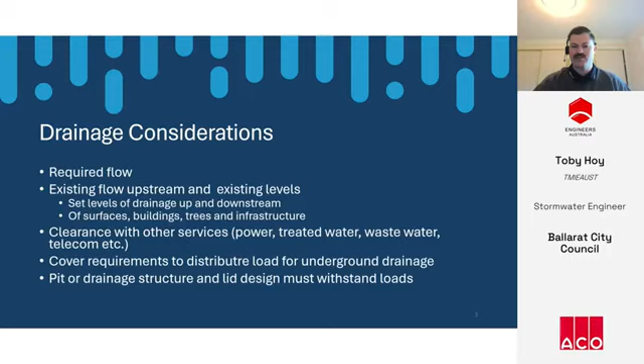For pipes, this is often a choice between concrete and HDPE, high density polyethylene, as these are the two most common pipe materials. We can also consider newer or innovative materials such as recycled plastic pipes. When lack of cover over pipes, flow volume or required loading becomes an issue, reinforced concrete box culverts or crown units become the standard product for use.

When designing drainage, we have to consider the land use where the lid or grate will sit. Different lids will normally be used for vehicle and pedestrian traffic zones. Grates in general should be installed perpendicular to traffic, for example in roadways, so that cyclists don't fall into them. Heel-safe grates are a common consideration for pedestrian zones.

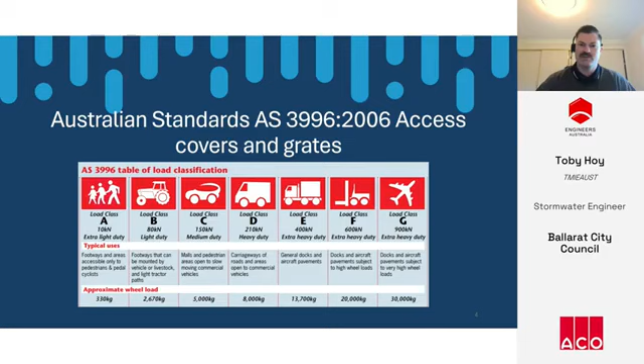As we're using open drains, we'll need regular culverts under roads and driveways. Swales also need maintenance - in this case, the grass needs to be mowed or slashed, and occasionally may need to be reshaped due to organic buildup and washout repair after extreme weather events.

Many open drains use alternative materials, such as brick or stones that have been split or cut. Ballarat was originally a gold rush town and still has many bluestone open drains constructed over 150 years ago. Another option regularly used, particularly for high flow areas, is to place loose beaching rocks in open drains to hold material in place and reduce the washout risk.

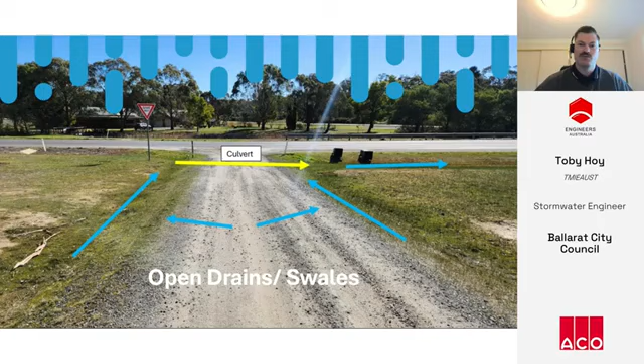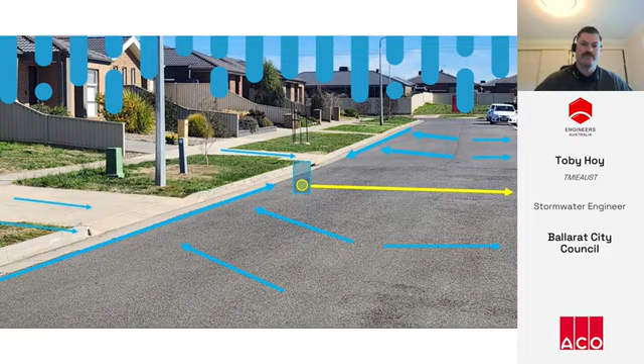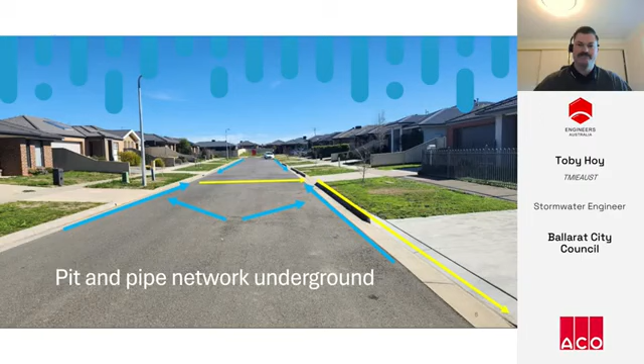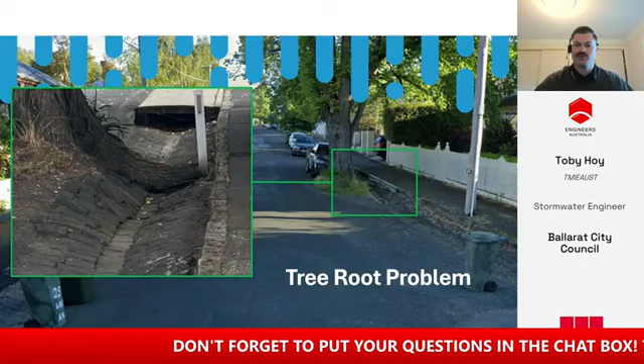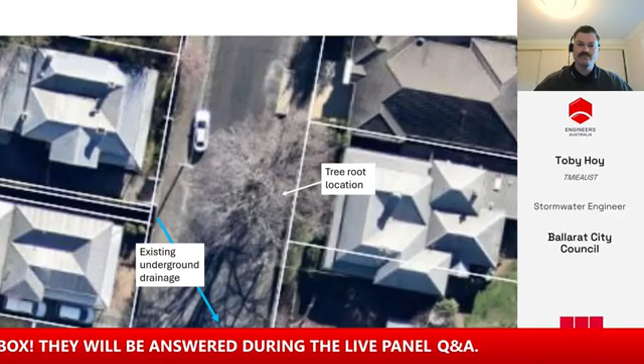In the footpath, we have the power pole shown and two different telecommunication lines. Anything here couldn't be more than 250 millimetres of depth. The tree itself has been assessed to have a maximum 15-year lifespan remaining, and the root in question is structural for the tree, so cannot be removed, chopped or ground down.

We have existing underground drainage nearby to the south. The community in the area didn't want the road, drain and footpath to look much different to how it currently looks, but they also want something done about the sitting water behind the tree root. These are difficult expectations to manage.

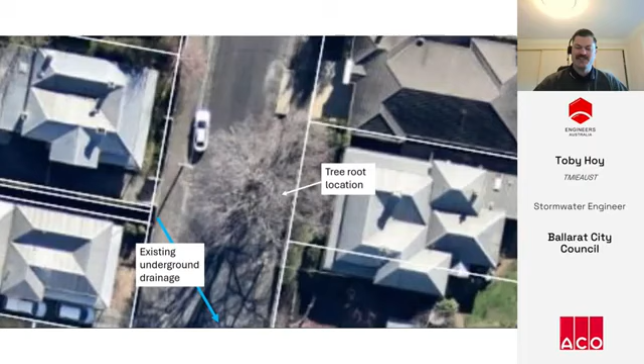A large-scale option that would have worked would have been to install new pits and pipes, or more likely box culverts due to cover issues, to capture the upstream flow and allow the remaining small amount of water to pass beneath the tree root. This would have utilised the existing drainage line to the south that this water enters anyway. Although it would enter earlier, it wouldn't have any capacity issues as it is already taking this current flow. This option would have been quite expensive and not met community expectations.

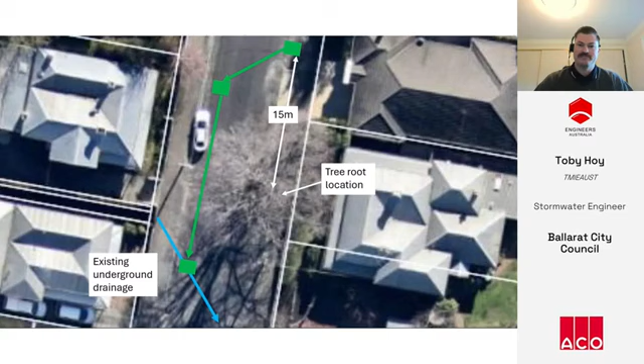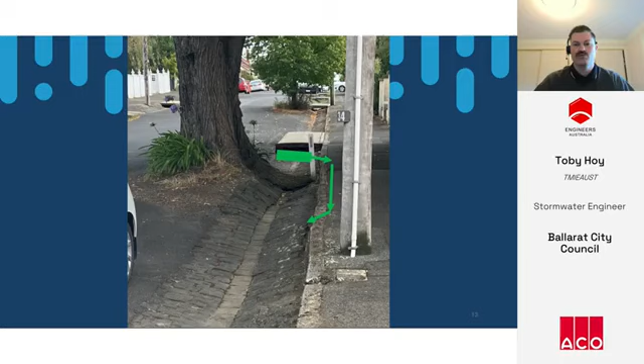Another option would be to construct a pit or end wall in the bluestone drain to capture water and carry it behind the concrete plinth next to the footpath in a grated channel. This would be cheaper than the first two options, but would still require work to tie into the bluestones and footpath, and most likely would not provide a neat finish. While this isn't always possible, it's good to aim for.

We didn't end up implementing any of these options, after I thought it might be worth trying something a bit different from the standard. Have a think about what you might do in this situation while I speak about some resources used by designers, and I'll circle back to what we constructed to manage this issue.

Now, design resources. Many local councils and other government organisations in Victoria have their own infrastructure standards that designers and developers must follow. The Infrastructure Design Manual, or IDM, is a joint initiative that includes over 40 municipalities working together towards consistent requirements and standards for the design and development of infrastructure. In practice, this results in more consistent infrastructure requirements across different areas of the state.

Austroads and VicRoads both have some good resources on their websites for drainage design, as well as a wide range of road-related infrastructure.

Typically, companies sell off-the-shelf products with designs to meet various Australian standards. For example, precast concrete suppliers will make pits to a standard, such as IDM, and provide Class B and Class D lids designed to meet Australian Standard 3996 for access covers and grates, previously mentioned. Australian standards cost money to use for commercial purposes and have only recently become free to view for non-commercial purposes.

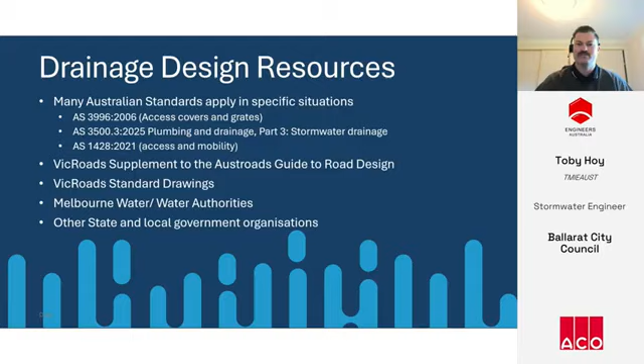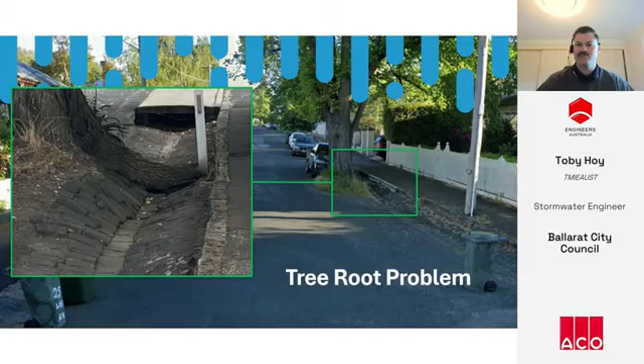Now, back to our tree root problem. Without further ado, we decided it would be worth a trial to replace the concrete plinth with a fabricated steel C-channel, hot-dip galvanised, allowing the existing space of the plinth to be used as a flow path for water and leaves to clear.

This is the result. While this doesn't solve the issue completely, it allows about another 150 millimetres of water to pass around the tree root with minimal disturbance to the surrounding infrastructure, and at a cheap price compared to our other options. It also allows many more leaves to flow with the water around the tree root rather than banking up and blocking the water.

Further, our channel is anchored into a concrete block poured behind, with an asphalt surface to match the rest of the footpath around the concrete and to match the area's infrastructure in general.

Here we have some during-construction photos showing the excavated space for the concrete block to be poured. Construction was in autumn last year, and as you can see, the leaf problem at that time of year is fairly significant.

This C-channel should last well beyond this tree's remaining life, and also has the opportunity to be reused at another location after that time, possibly with some small maintenance on the channel, such as galvanised paint or any sections of hot-dip gal that have broken down.

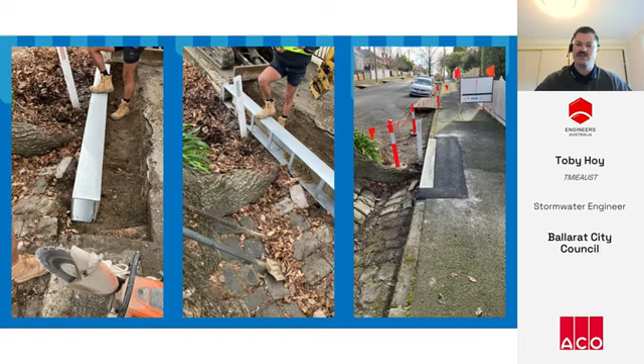For the outlet end of the channel, we formed concrete to a 45-degree angle to direct water back into the bluestones and remove this space for leaves to be caught and sit in the channel.

The C-channel has now been installed and operating for over 15 months. It hasn't been moved yet, over 1.5 autumns and almost 2 winters. So we hope that we will achieve our goal of getting the water past this tree root for its remaining years.

Thanks for listening, everyone, and thanks to Engineers Australia for providing the platform to speak. For my parting words, I'll leave you with a Leonardo da Vinci quote: "Simplicity is the ultimate sophistication."

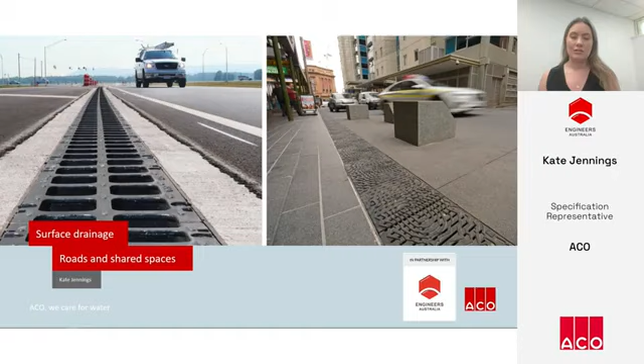My presentation today looks at drainage methodologies in roadways and shared spaces, along with all of the key considerations that must be made by designers when selecting drainage systems in these applications.

And we'll begin by looking at surface drainage in roads specifically.

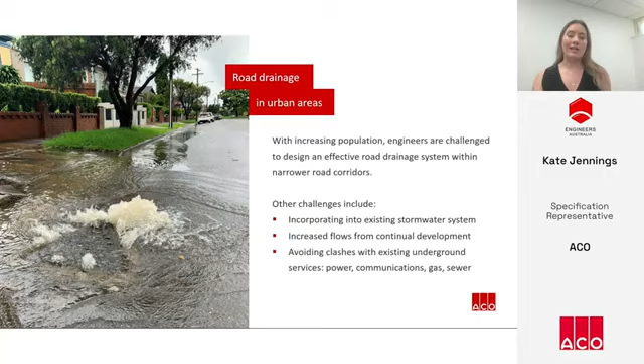With modern road drainage design, we have a lot of challenges from our growing population. As cities become more densely populated, engineers are tasked with designing effective road networks and integrating drains and other services into narrower road corridors, whether widening or reconfiguring existing roads or adding turning bays at intersections. Beyond fitting more into a smaller space, other challenges include connecting into existing stormwater systems that can't cope with increased flows from new developments, and avoiding clashes with underground services.

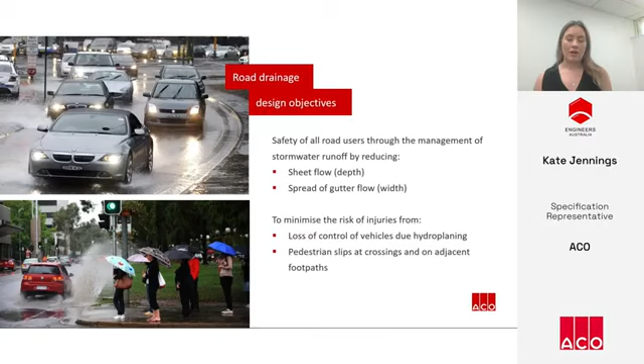The primary objective of road drainage is to ensure the safety of all road users, whether motorists, pedestrians or cyclists, by reducing the depth and width of flow within a road. Managing, reducing or eliminating sheet flow and the spread of gutter flow minimises the risk of hydroplaning and vehicles losing control, as well as slips, trips and falls for pedestrians.

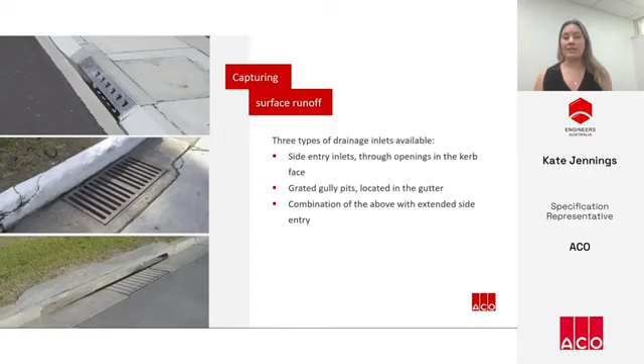There are three traditional types of road drainage inlets available: side entry inlets through openings in the kerb face, grated gully pits positioned in the gutter, or a combination of the two with an extended side entry. All of these traditional methods allow for intermittent capture of surface water.

You can also capture water continuously rather than intermittently, using grated trench drains or slotted kerb drains. These are problem-solving solutions used in areas that are very flat with minimal fall, or that have services close to the surface. These continuous capture systems are more cost-effective than installing closely spaced traditional kerb inlet pits and deep pipe work, which we'll look at in more detail later.

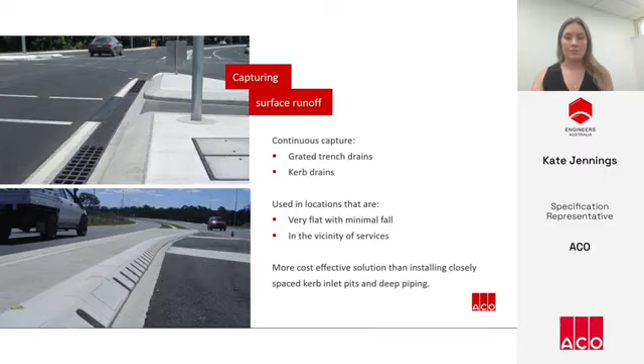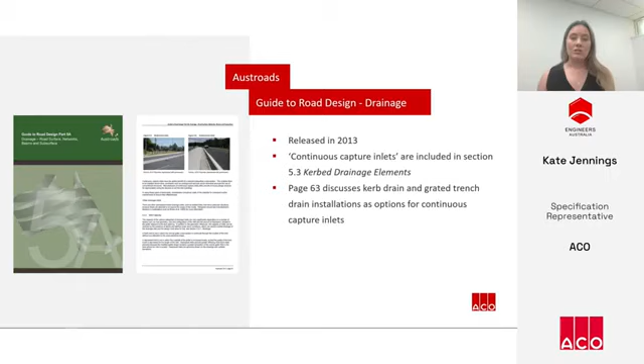Let's focus now on continuous capture inlet systems. At ACO, we've been selling our drainage channels in roads across Australia since the mid-1990s, but they became a widely accepted method of draining roads in 2013 when Austroads released the Guide to Road Design, citing these products as solutions. It was written with a consortium of all the state road authorities, though there is some individuality across states and territories.

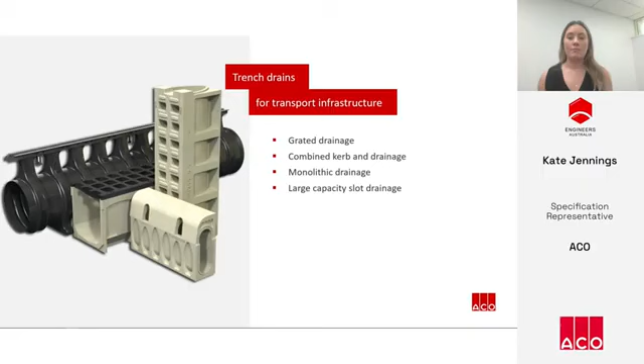There are a number of products for draining roads available in the market: grated trench drains, combined kerb and drainage systems, monolithic channels and slot channels.

Grated trench drains are one of the more popular types of continuous capture inlet. Due to rainfall variance in Australia, 200 or 300 millimetre wide channels are commonly specified, as they're compact and have variable depths to ensure runoff is discharged efficiently.

There are generally three types of grates: high flow with large apertures, heel-safe with smaller apertures for pedestrian safety, and transverse slotted grates. These grates must be load rated to Class D in AS 3996, and preferably fitted with boltless locking mechanisms that allow quick access for maintenance teams to clean out the trench drain while securing the grate in the channel.

High intake grates with large slot sizes also allow the channel to be cleaned without removing the grates. A sucker truck with a high pressure washer breaks up any sediment within the channel and washes it down to the vacuum pump, which sucks up all the suspended silt into the truck—all without unlocking or removing any of the grates.

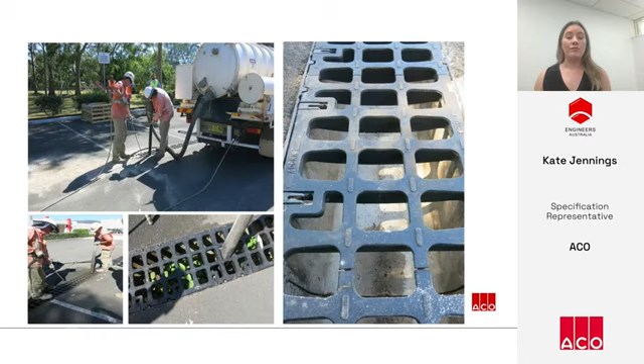Looking at the drainage channel itself, precast polymer concrete channels have a very smooth internal surface and are available with built-in slopes to remove water effectively from flat areas. Hydraulically, a V-shaped profile channel creates higher velocities during low flows compared to U-shaped or flat-based channels.

This promotes self-cleansing to help keep the channel clear of debris and silt. In precast channels, a V-shaped profile also creates deep pockets in the side walls, allowing the concrete encasement to mechanically key into the channel for a strong, integrated installation. Channels with ductile iron edge rails, rather than steel edge rails, provide a more durable solution in road and infrastructure applications, and edge rails with anti-shunt lugs prevent longitudinal movement of the grates.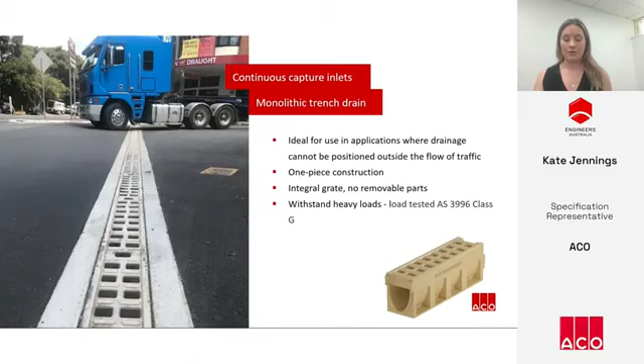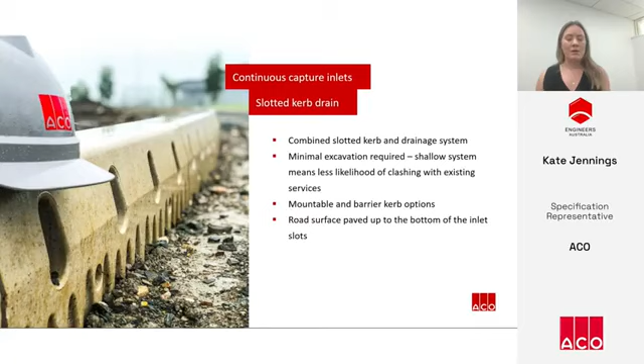Another type of monolithic continuous capture inlet system is the slotted kerb drain. This product combines two functions: the drainage channel with the kerb itself. This is a shallow solution that requires less excavation for installation, and therefore there's less likelihood of clashes with existing underground services. Options include semi-mountable and barrier-type kerb profiles, depending on the specific area within the roadway.

The last system here are slotted drainage systems, and these are often manufactured from MDPE. This makes slotted channels really lightweight and easy to maneuver on site. So installing these channels is incredibly quick because you don't need cranes to lift them into place.

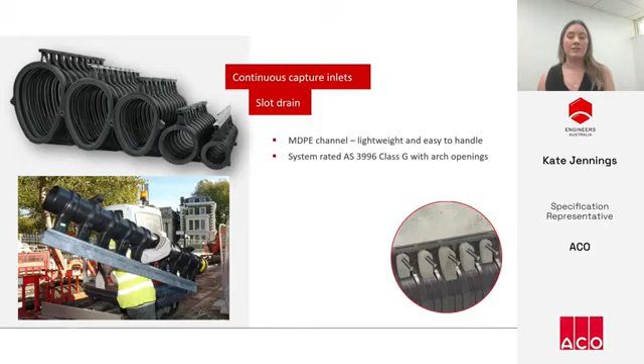Some slot channels are designed to be super strong when they're integrated into a slab. The arch opening, shown at the bottom right of the screen, allows reinforcement to pass through the arches to tie the slab together on either side of the channel without disrupting the line of the inlet slot, allowing for an unbroken reinforced slab detail.

I'm just going to quickly run through some installation examples of where graded trench drains and slotted kerb drains have been used on roads and highways around Australia.

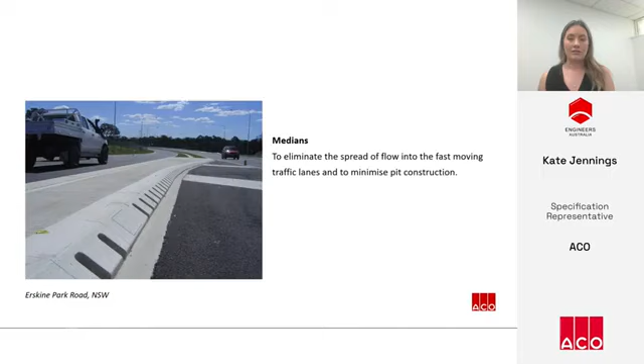For medians, kerb drainage systems might be used to eliminate the spread of gutter flow into the traffic lanes by continuously capturing the water rather than traditional pit and pipe construction. Or you could use a graded trench style or a slotted style drain.

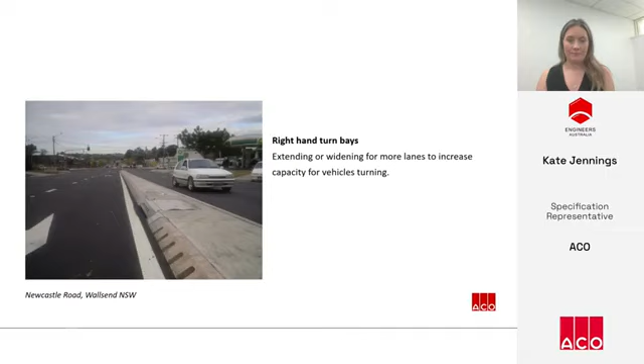For right-hand turn bays where you're trying to fit more lanes into an existing area, slotted kerb drains can be a really helpful solution to give as much space to the roadway as possible. But some engineers or road authorities may prefer graded trench drains to slotted drains in this application.

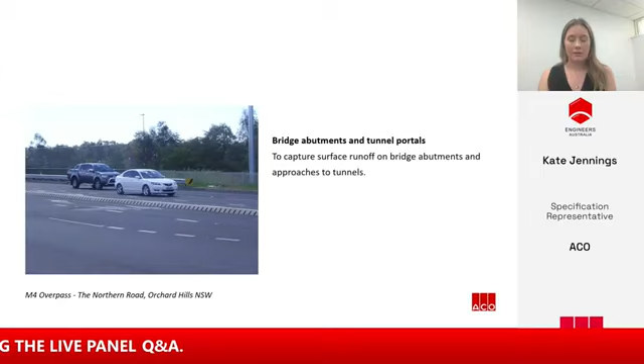In kerbside gutters where existing inlet pits are spaced too far apart, a slotted kerb drain could be used, or again, a graded trench drain solution could also be used. Also on bridge abutments and tunnel portals, you can again use a slotted kerb drain or a graded trench drain solution.

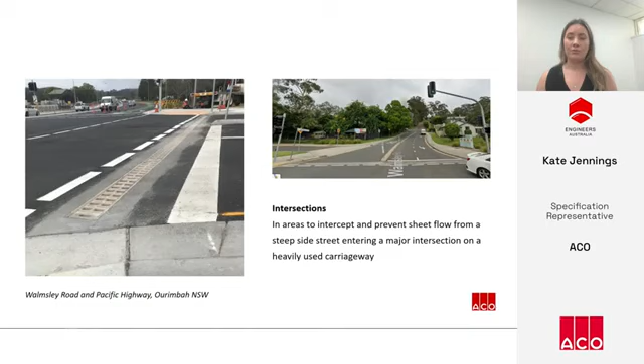A big driver on every project is cost. Precast slotted kerb drains and grated trench drains are ideal for applications where kerb inlet pits would otherwise be spaced closely together at intervals of 20 metres or less. It's just more expensive to install pit and pipe in these applications than a grated trench drain.

We've carried out some independent install cost analyses of kerb inlet pit and pipe systems compared to precast grated trench and slotted kerb drain systems. The outcome of this was that grated trench drains are 15% cheaper to install than pit and pipe, and slotted kerb drains 36% cheaper. So there are quite significant savings to be had.

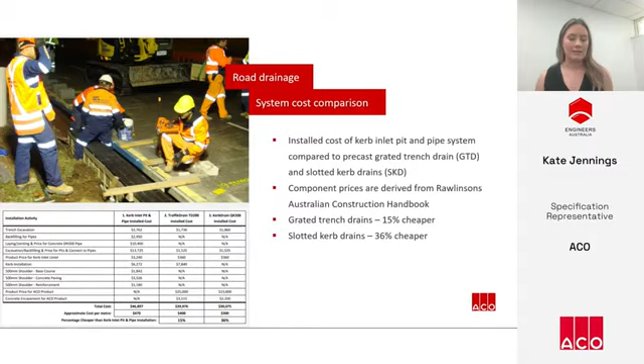We'll now look at shared spaces and the considerations that need to be made to correctly specify and integrate a surface drainage system that's safe for both motorists and pedestrians.

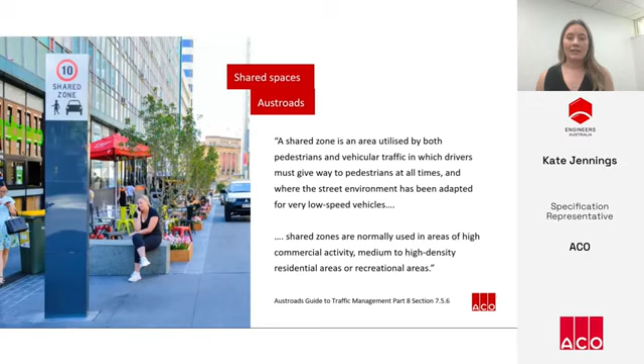Shared spaces are increasingly transforming city centres by combining transport hubs with public domains, and that brings with it some design challenges. I'll share some examples of roads that have been transformed into shared spaces.

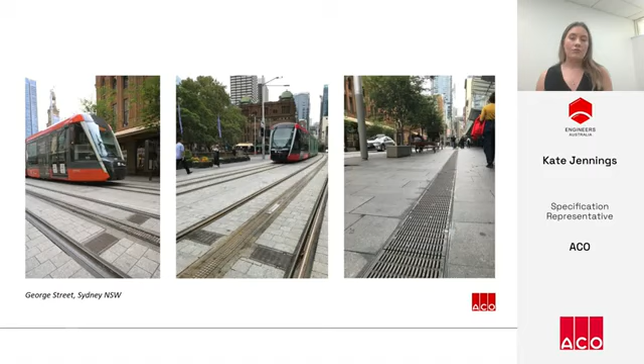George Street in Sydney has been converted into a shared zone with pedestrians, trams and some service vehicles. A flat space was created to ease the movement of pedestrians by removing curbs and gutters. Grated trench drains and specifically designed tram drains were used extensively throughout this light rail corridor.

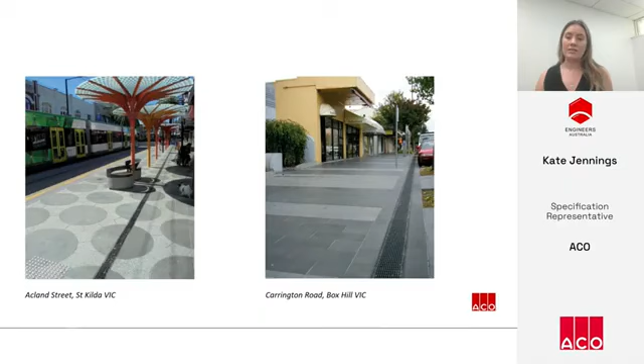These are some Victorian projects where curbs and gutters were removed and replaced with grated trench drains to allow pedestrians to move in all directions. And some South Australian examples of grated trench drains incorporated into nicely paved pedestrian areas that are also accessible by motorists.

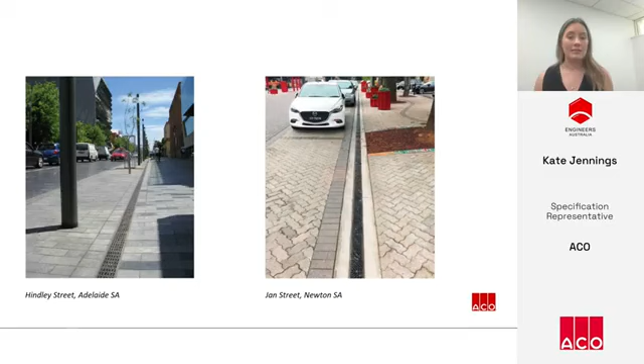And lastly, some Queensland examples of shared spaces in an education precinct and in high-density residential areas.

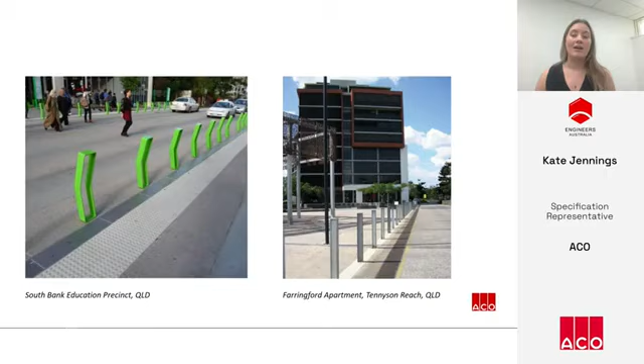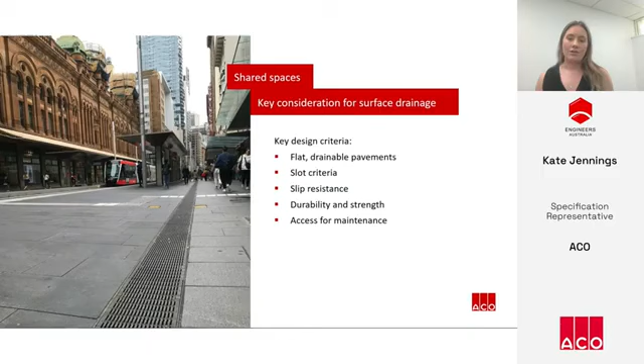We'll now look at some key factors to consider when designing drainage systems within shared spaces. Ideally, shared spaces are located in areas with relatively flat pavements, and the surface drainage needs to be designed with an appreciation of the grate slot sizes, slip resistance, loading, and durability, and must be designed for both pedestrian and motorist use.

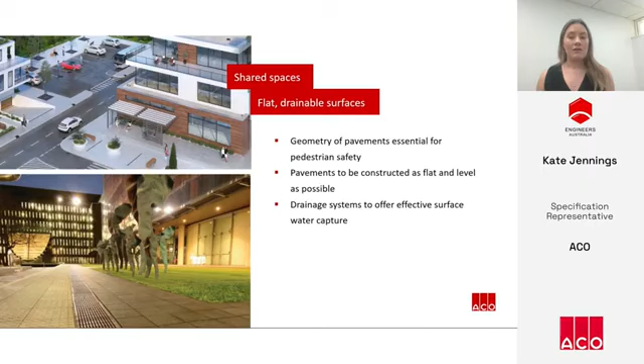Uneven or steep pedestrian spaces will create trip hazards, particularly for the elderly, children, or those with a disability. Surface water management often leads designers to create steep pavements, but they can be designed flat if drainage is properly considered and incorporated during the design phase.

A way to achieve a flat pavement is to use a graded trench drain with built-in slopes. This promotes efficient drainage of the surface. As we discussed earlier, precast trench drains with a V-shaped profile have hydraulic advantages over U-shaped channels, particularly during low flows, as the V-shaped profile creates higher velocities within the channel and promotes self-cleansing.

Precast trench drainage systems are quick and easy to install, particularly when compared to cast in situ drainage or point drainage.

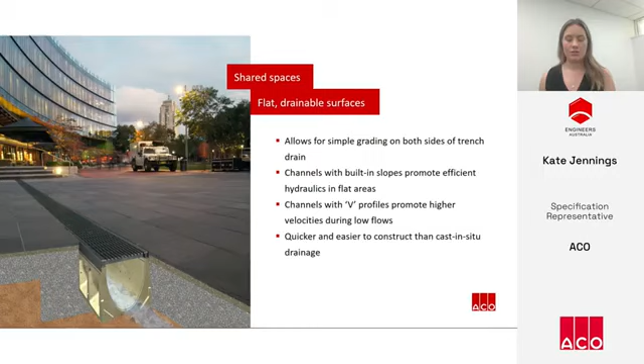The next element to consider is slot sizes, and slot sizes are critical for pedestrian safety, and we don't want to hinder accessibility for wheelchair and walking cane users. New building works must be designed to comply with the Disability Discrimination Act, which makes it against the law for public places to be inaccessible to people with a disability.

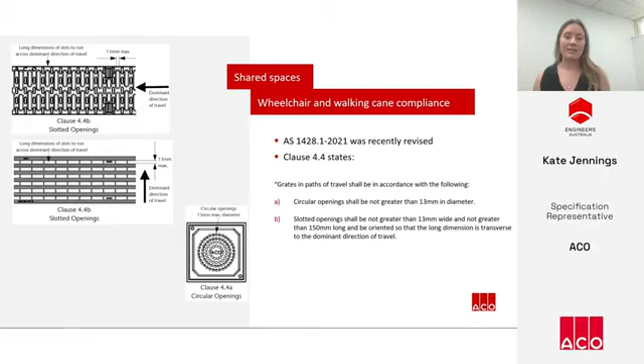Slot sizes of grates will also impact the safety of cyclists and pedestrians. AS 1428.1, the Design for Access and Mobility, was re-released in 2021. It's been updated so that slots 8mm and less can be positioned without restriction. However, slot sizes that are 8 to 13mm must be positioned outside of the dominant direction of travel.

Bicycle safety is mandated by AS 3996. This standard takes into account the type of bar used in a grate and the maximum slot dimensions to stop bicycle tyres getting wedged in the grate.

Heel safety is a really common complaint from pedestrians, and whilst there's no Australian standard for heel safety, there is an American standard that calls for slots less than 8mm. But there's a trade-off here between hydraulic intake and heel safety. So we don't want to see extremely narrow gaps that, whilst they are heel safe, don't actually collect much runoff, and the drain becomes more prone to blocking up.

As a result, at ACO, we lean to a guideline of 10mm and less would constitute a heel safe grate.

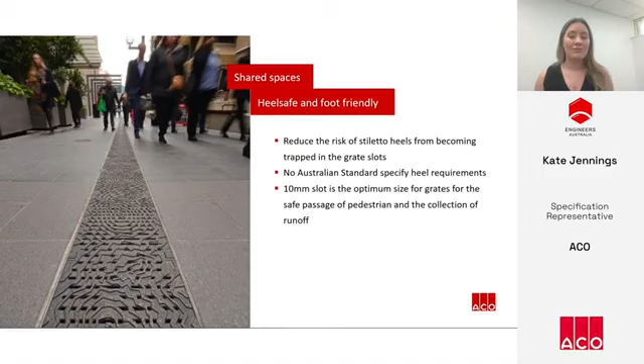Slip resistance is becoming a major concern for asset owners as litigation increases from slips, trips and falls. AS 4586, with a supporting handbook HB 198, stipulates the minimum slip resistance ratings for a variety of different applications. The standard outlines 3 test methods to simulate different applications as a means to assess the slip resistance of a grate.

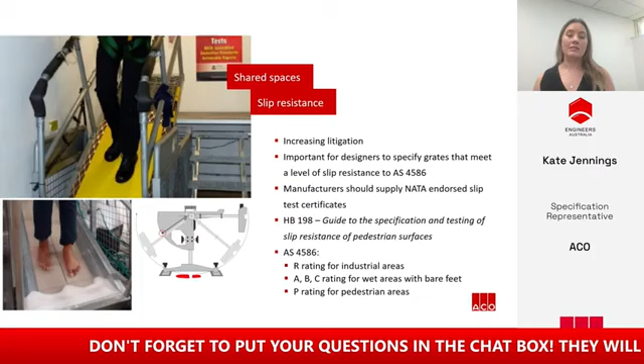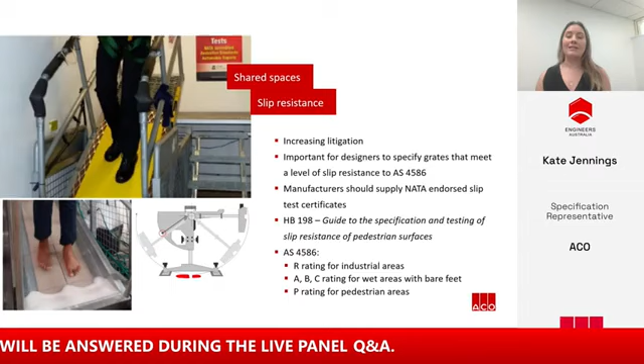The oil wet ramp test, pictured at the top of the screen, with ratings of R9 to R13, is designed for industrial and commercial environments where there's likely to be animal or mineral oil on the floor, for example in car parks or commercial kitchens.

The wet bare foot test, pictured at the bottom left of the screen, has ratings of A, B, C, and is designed for wet areas with bare feet, such as pools or changing rooms.

And lastly, the wet pendulum test, with ratings of P0 to P5, is the most widely used test, as it's the only test that can be conducted in situ. This test is most suited to areas that are rain affected, such as shared spaces and building entries.

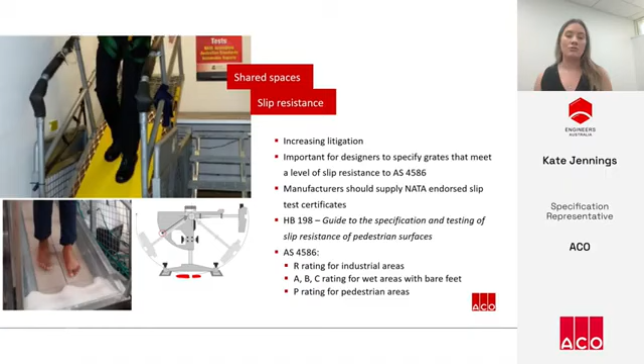Next up is loading. Considering the anticipated vehicular load that a drain will be subjected to is critical. Underestimating this can lead to product failures, and overestimating it adds unnecessary costs. Load isn't just related to the physical weight of the vehicle. We also must consider the type and speed of vehicles, the wheel load, how the wheel will move over the grate, and the number of movements as well.

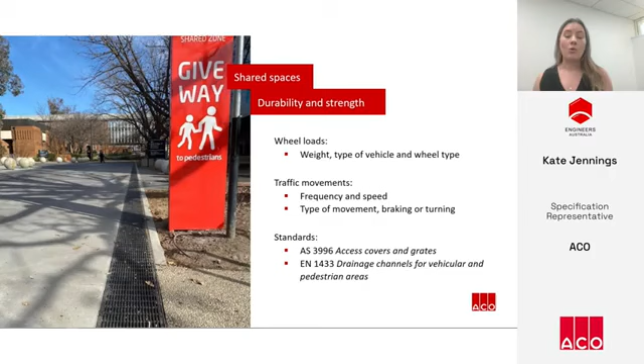AS 3996 is the Australian standard for access covers and grates, and this stipulates load class requirements for grates, but it doesn't take into account the underlying drainage structure.

AS 3996 classifies various load classes from pedestrian, which is class A, all the way up to aircraft pavements, which is class G. Shared spaces will often fall into the load class C category, as shopping malls and pedestrian areas are open to slow-moving commercial vehicles.

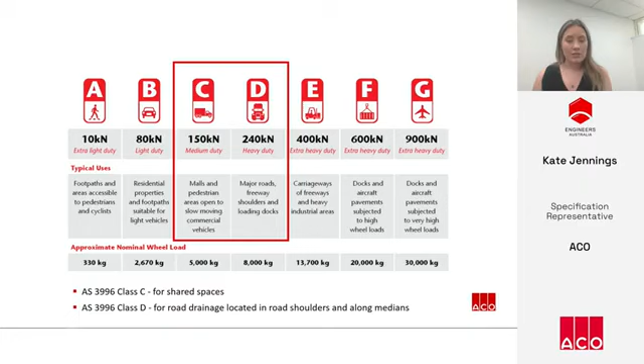Road drainage should be specified as class D for major roads, freeway shoulders, and loading docks.

The last element to consider is security, both to avoid theft and to reduce the risk of loose grates in trafficable areas. Using a boltless locking system on grates is a fantastic way to secure the grate into the channel, but it also allows for quick access for cleaning.

The other option is to use bolted grates, but the risk is that bolts could vibrate loose during service. It's also quite common to see bolts removed during maintenance but not actually put back in place.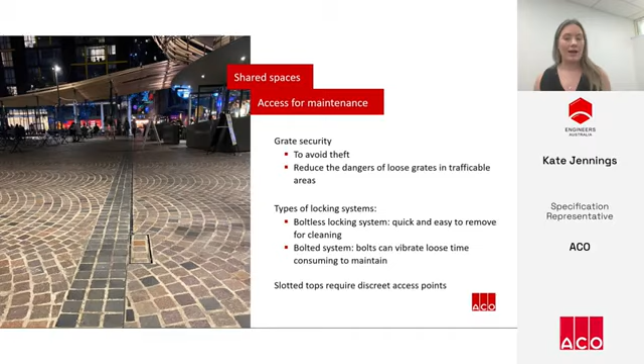Slot drains, like the image on screen, are often favoured in shared spaces because landscape architects like the discreet kind of drainage methodology. These also require unobtrusive access points to help preserve the visual continuity of the pavement but give access to the pipework. These access points should be installed at the start and end of every run and every 20 metres or so throughout for maintenance.

Light rail is often the epitome of shared spaces, combining pedestrians with motorists and trams. And with state governments all over the country investing billions of dollars into public transport, we're seeing a rise of new metro lines and light rail projects that connect commuters from their home into city centres and create shared spaces around each station through highly trafficked pedestrian areas. Designers are being challenged to provide effective drainage solutions in very flat areas and with the complexity of draining the track rail grooves too.

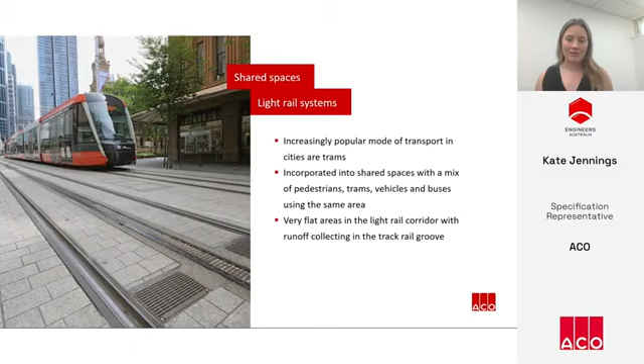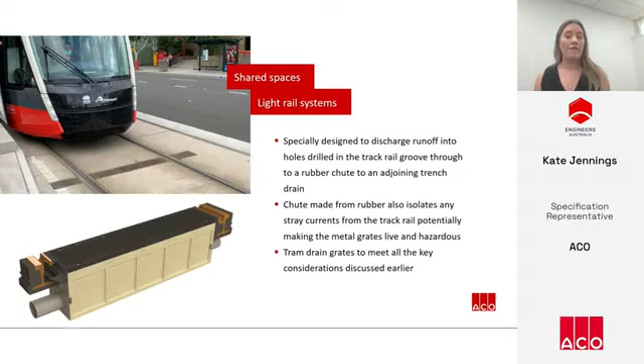Specifically designed tram drains discharge the flow from the track rail groove through holes in the rail into a chute, which then connects into a trench drain and pipe system. The chutes are made from rubber and they isolate any stray currents from the track rails that could make the grates live. Tram drain grates should also be designed to take into consideration the 5 key factors that we discussed earlier.

Wherever the drain is going, whether it's in a road, light rail, or a shared space, absolutely critical is selecting a drainage system that's going to work, whether it's going to do what it needs to do. The hydraulic performance of both trench drain and grate is really important. Now, the hydraulic performance refers to the amount of water a drain can collect in a given period of time, and that drives the product selection not only for the channel but also for the grate.

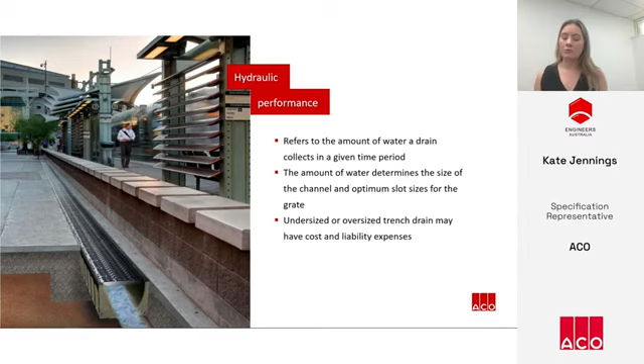An undersized drainage system can impact safety and cause property damage if the flows are not captured, but conversely, an oversized system just adds unnecessary cost into a project. So it's important that we get this right.

The science behind the hydraulics of trench drainage is complicated, and there are many theories and equations to calculate it. And it's common for designers to use a simple pipe or open channel theory as means to calculate drainage capacity. However, this is assuming that the flow in the channel is uniform. So this works for culverts or pipes where liquid moves from one end to the other, but non-uniform flow is a more accurate way to model a trench drain's hydraulic performance, as it takes into consideration the collection of flow along the length of the run.

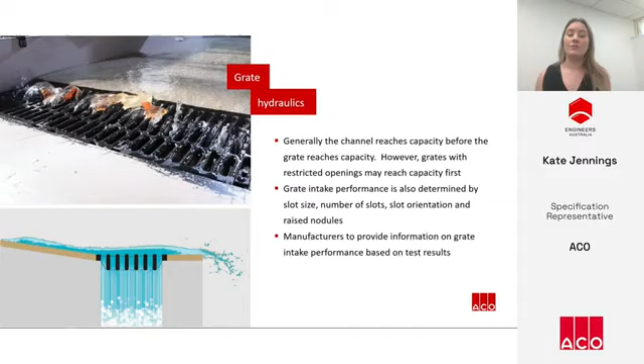Beyond the pure grate intake area, which is the open area of the grate, there are other factors that influence grate hydraulics, including the slot size and orientation. The number of slots and any raised slip-resistant nodules are also impacting the flow of water, as they can slow the flow down and help direct the water into the slots. With both channels and grate hydraulics, the only real way to know how they perform is to test them.

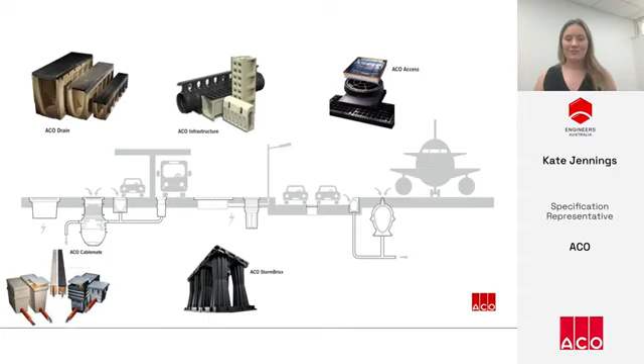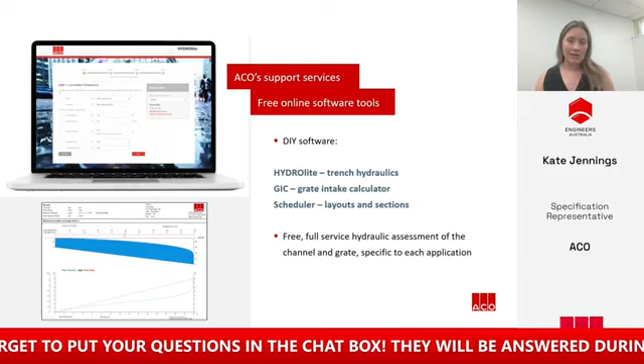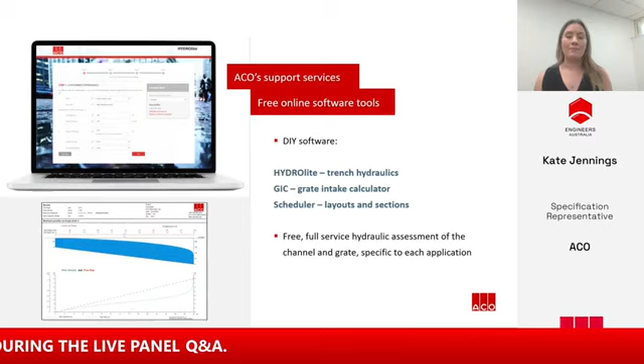Beyond our products, we also have a lot of support for designers, both with online DIY channel and grate sizing programs and tailored product support from our technical services engineering team. These DIY programs are a fantastic way to get really quick information on hydraulic performance of channels and grates. Hydrolite is our channel sizing program, and GIC is the grate intake calculator. Both of these are grounded in experimental test data.

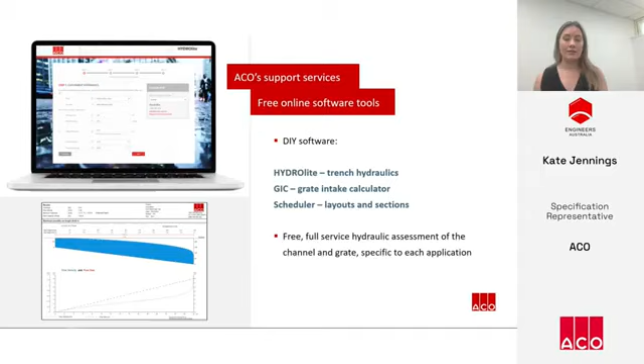We also have another program called Scheduler, which can draw trench drain runs and provide layouts, long sections, and bills of materials to assist in procuring and installing products, which is particularly helpful if you're specifying sloping runs. AskACO.com.au is how we capture all of the services that we offer. So you can head to this site to access all of these programs for free and without obligation.

And in case you want to dive even deeper into what we've spoken about today, we've developed 2 white papers in partnership with Engineers Australia. The first is dedicated to understanding the hydraulics of trench drains, and the second discusses the importance of proper surface water management for pedestrianised pavements.

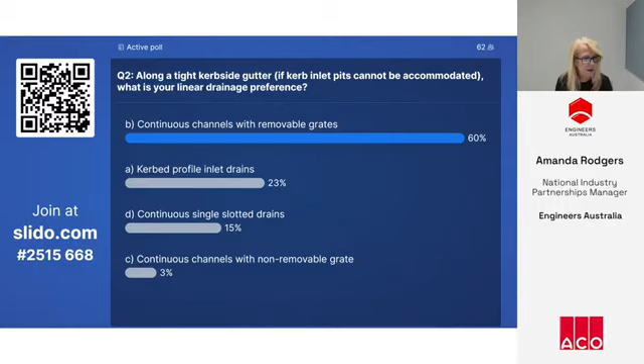So Darren, I think we have one that's well out in ahead, continuous channels with removable grates. Do you want to just comment on that one too?

Thanks, Amanda. Yeah, look, kerb inlet pits and pipe systems, they're the traditional way of collecting water, and it serves its purpose when there is grades along the road. Where continuous capture inlets come in is for very flat areas. So for continuous channels with removable grates, that's very popular with the road authorities. They come in different depths and widths that are available to capture whatever flow you need. So they're very flexible. ACO, we supply slope channels too. So it's very flexible in flat areas where we can provide a fall along the invert.

Kerbed profile inlet drains have also been popular with the road authorities too, especially when there's very tight space constraints. With the curb inlet, the curb face is your inlet hole, so you're really not reclaiming much more of the roadway compared to a continuous channel, which actually needs some space on the road to be installed in. So for very tight areas, the curb profiled inlet slot drains, the slotted curb drains, are the best option.

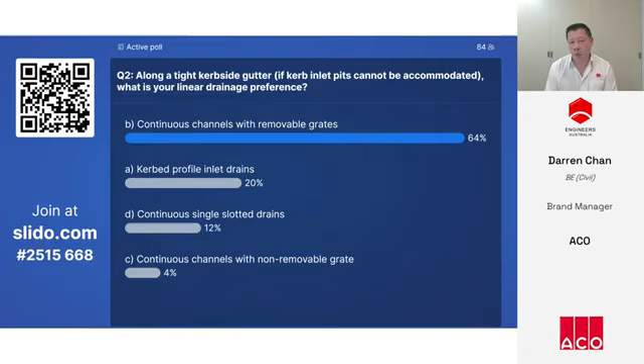Continuous single slotted drains, they're very narrow. They serve their purpose, but they can be easily blocked up, so might require more maintenance with those ones. And then the continuous one with non-removable grates is the best option for when it's across the traffic lanes.

Thanks. Thank you, Darren. And our third and final question. What do you value from a drainage supplier? And if you could rate 0 for the least important, 5 for the most important: A, downloadable drawings, data sheets, B, hydraulic services, C, pavement/structural integration advice, D, drawing, run scheduling services, and E, phone face-to-face assistance. Thank you, everyone.

Darren, if you'd just like to comment on our final question before we head into the Q&A. Thanks, Amanda. As manufacturers, we like to back up our products, and how we back it up is through what we can provide engineers and designers to help them specify the products into their plans. So downloadable drawings and data sheets, we cover that. ACO has a suite of data sheets and drawings within our website. Just head to the downloadable section, and there's installation drawings, there's product data sheets that you can download.

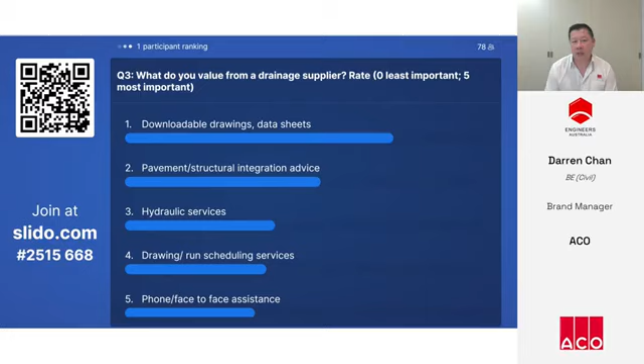Pavement structural integration advice, there's installation drawings in different pavements, such as concrete, asphalt, pavers. We have a technical service team that provide hydraulic services, so you can tell us the amount of water that we need to collect in the drain, and we can help you size up the drain. We can also help you provide pit spacings, depending on the capacities of the trench drains. And yeah, we're always looking for ways to provide a service that would back up the products and help you provide a good design.